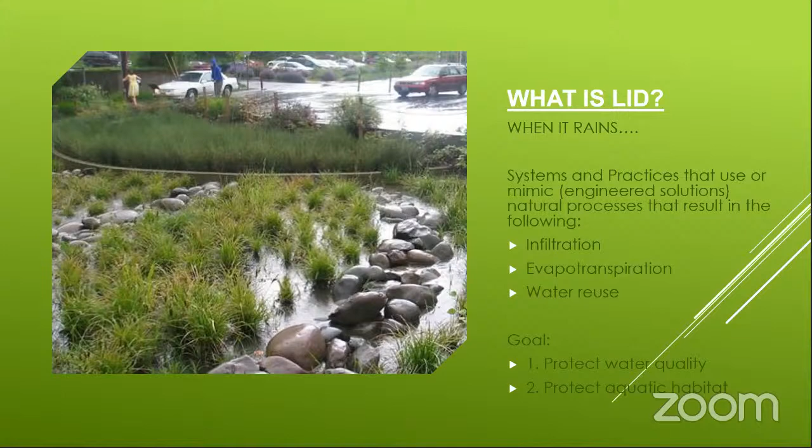So when it rains, we're trying to mimic infiltration and evapotranspiration. How are we going to do that? The number one way is through retaining the runoff from an 80 percentile storm. We want, for 80% of the storms we see in Washington County, zero discharge. It's going to be different from a detention basin - it's 100% retention. We want essentially zero discharge under 80% of the storms we're going to see. Through the presentation, that rule is called the 80th percentile rule.

Just a little history - you might remember from a couple of past presentations it used to be the 90 percentile rule. That's been reduced down to the 80th percentile, which is good news for everybody. This is one of those things that was great to have happen.

So we're going to retain 80% of all storms we see in Washington County. Who does that apply to? All the MS4 communities right now are required to implement LID strategies - those are St. George, Washington, Ivins, and Santa Clara. We're anticipating that more cities as they grow are going to be included with these MS4 cities, probably Hurricane or maybe Cedar City. But right now in our Dixie Stormwater Coalition, these are the only cities participating and having the requirement of LID.

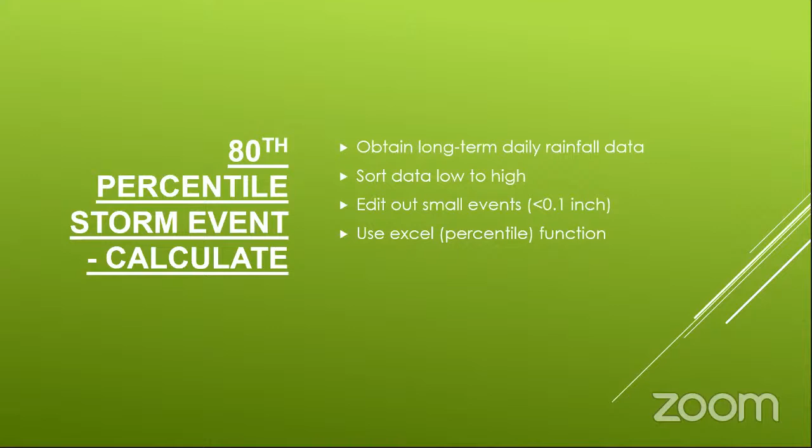So how did we obtain the 80th percentile storm event? We identify that storm event purely by depth - we're not worried about a 10-year event versus a 100-year event or whatever. What we did is obtain all the rainfall data for as long as we could go back, sorted it from low to high, took out all the data for events smaller than 0.1 inch, and used a percentile function in Excel. For St. George, Washington, Ivins, and Santa Clara, the 80th percentile depth is 0.44 inches. You're not going to have to compute or calculate this - we just want you to use this number, 0.44 inches.

Can you guys still see the slide? You like it with the lights off? Can you see that better? Would you rather have the light on? Okay.

So this 0.44 inches is going to be the 80th percentile storm depth. What that means is if we want zero runoff from 80% of our storms, if you see any storm between 0 and 0.44 inches, you're going to have zero runoff from your site. If you see a storm that's bigger than 0.44 inches, then you'll begin to see runoff from your site. But anything less than 0.44 inches, you should have zero runoff from your site.

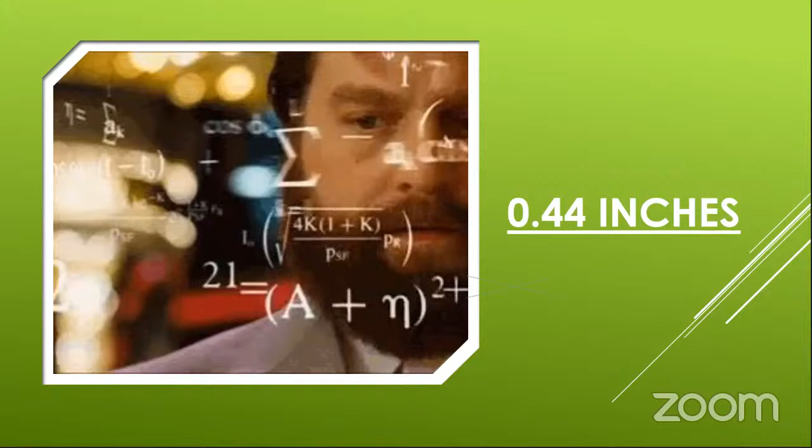Entering storm drain systems, washes, the river - it's kind of a big deal. If this is the first time you've heard this, this is kind of a big rule.

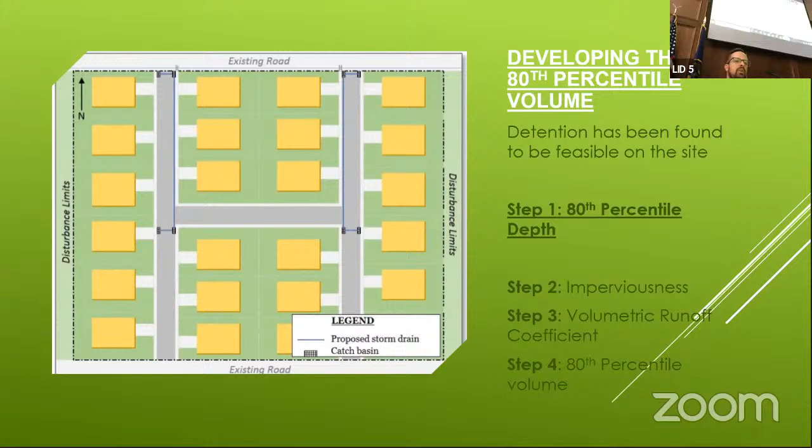So now that we know what our percentile depth is, how do we determine what the volume is going to be? The first step we've already done - we've got the 80th percentile depth. Step 2 is going to be calculating our imperviousness. Step 3 is going to be determining what our volumetric runoff coefficient is - I'll talk about that in a second. And then using those 3 parameters, we're going to come up with what our 80th percentile volume is. That's how much volume we're going to have to put on site in order to retain the 80th percentile depth.

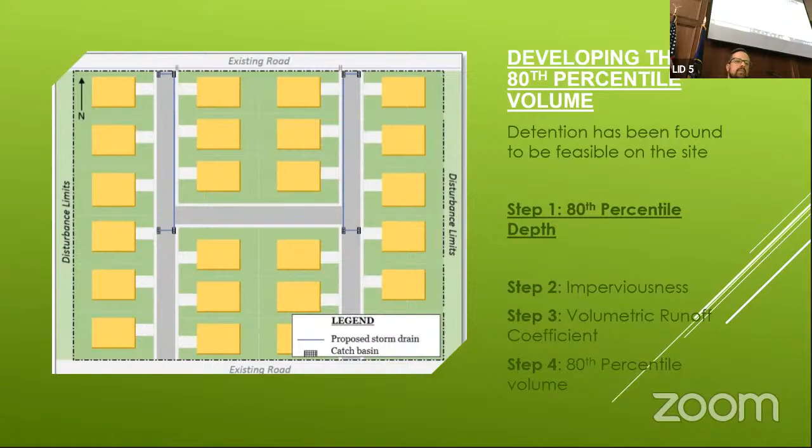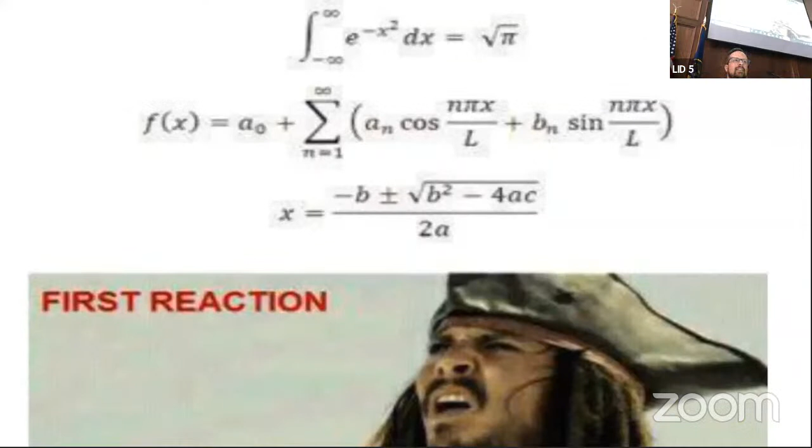First time you see this, you're going to be a little confused. It's going to be scary, but I promise you it's very simple. I see a lot of faces just like Jack Sparrow out there.

Just kidding. Okay, so number 2, imperviousness. Our project imperviousness is essentially the post-development impervious area divided by the project limits. Pretty simple. So what's included in impervious areas? That's going to be homes, future driveways, concrete work, asphalt, streets, sidewalk, curb gutter, buildings, parking lots - anything that an engineer is going to deem impervious.

You're going to say, well, we don't know what kind of homes or flat work is going to be done at the initial stages. We're just expecting you to use engineering judgment and come up with those numbers based on your criteria of what you anticipate seeing there.

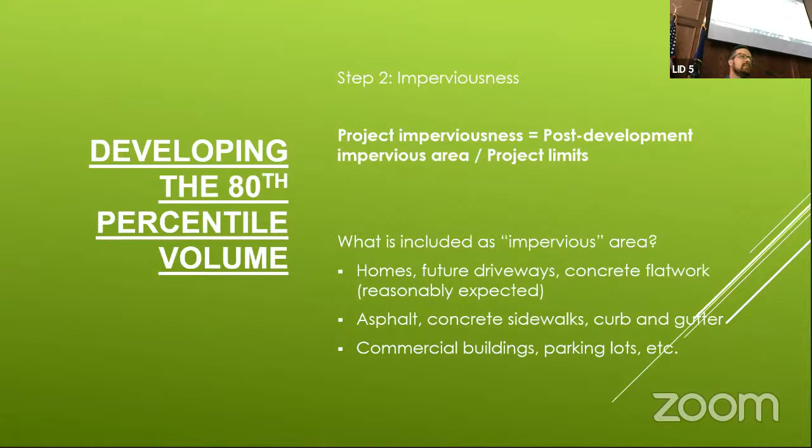And what this equation is doing is it's saying, well, we're not going to have 100% runoff of that depth. There's going to be some shallow areas, the asphalt's going to absorb some water. So this is just knocking further down the amount of water that's going to run off that you need to retain.

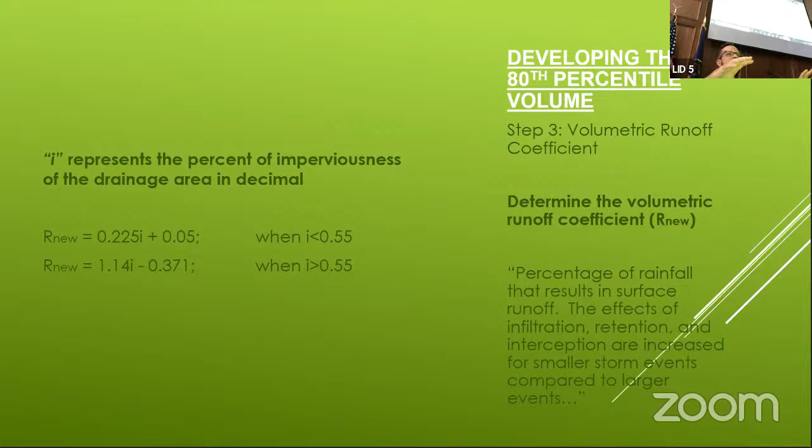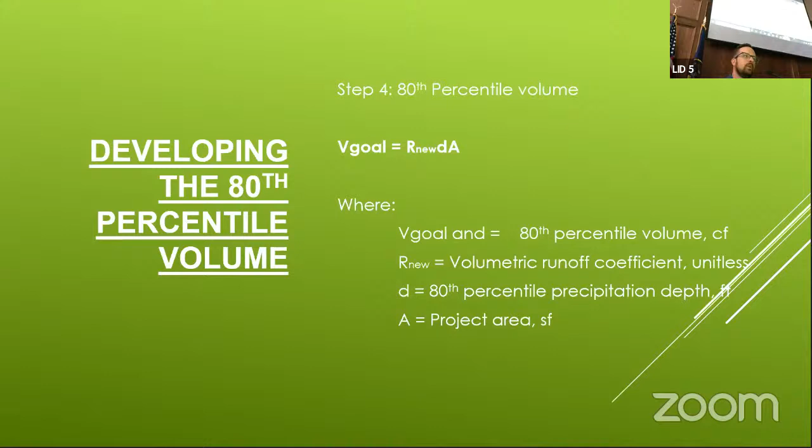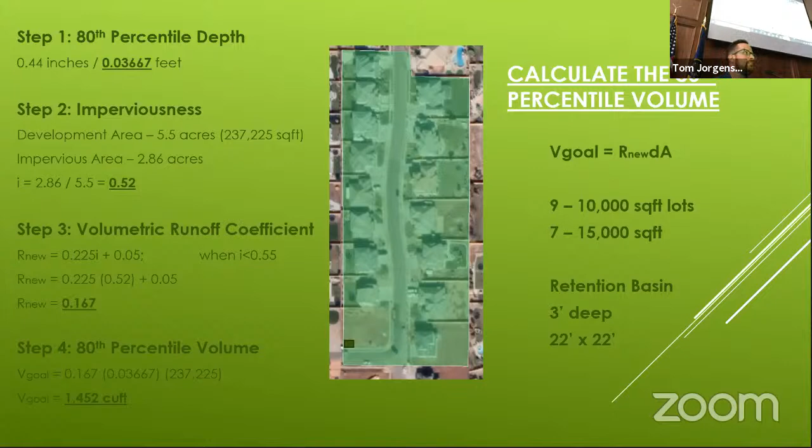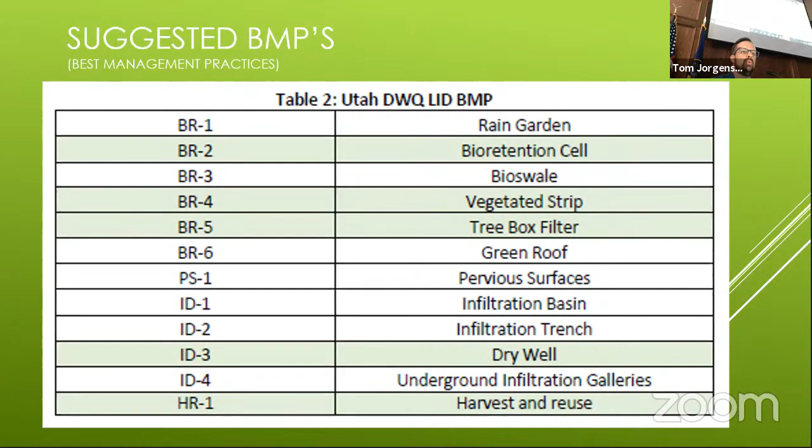So by what means are we going to be able to retain? In our manual, the state had a manual with a bunch of BMPs, and the Dixie Coalition has also created a manual, and we've included a bunch of ideas for ways that we can retain the stormwater. It doesn't have to be a big open retention basin. Obviously that's a pretty easy one we can all imagine, but we have all these other options that we can use to count as retention for meeting that goal. Here's a bunch of exhibits that we're going to go through.

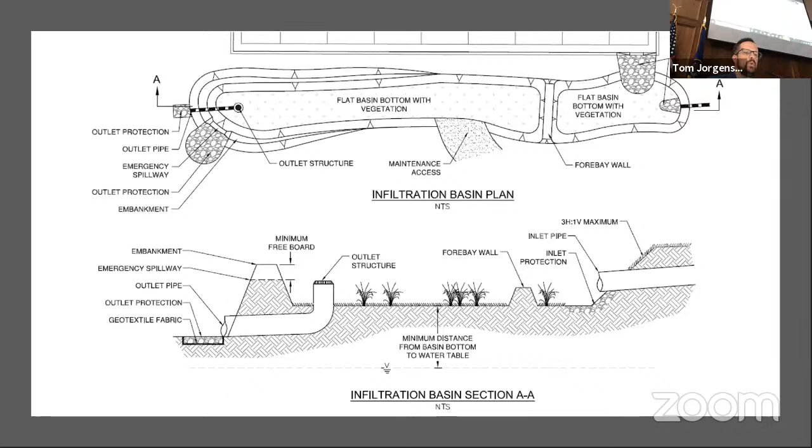So here's your standard retention basin. We're calling it an infiltration basin. You can see the outlet structure is raised up, so there's no way any of that water can come out until the water level has come up to that point. At that point, we want water to leave our site based on our detention requirements. We still want to use our storm drain systems. This is just an example, you can use these details. We have these details in PDF and CAD format, so if you want to request these details to help you through the process of a design.

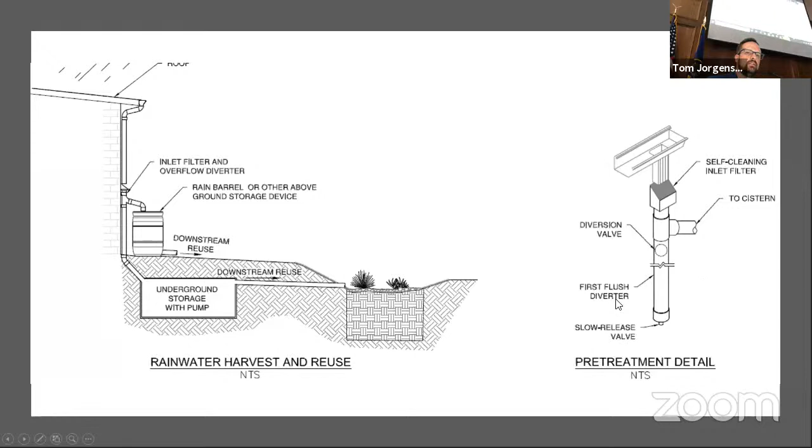Here's a rainwater harvest and reuse system. We could do above ground or below ground systems with pumps. They have an overflow that goes into some other areas, maybe a pre-treatment on the downspouts. Here's an infiltration trench along the linear sides of a parking lot or whatnot.

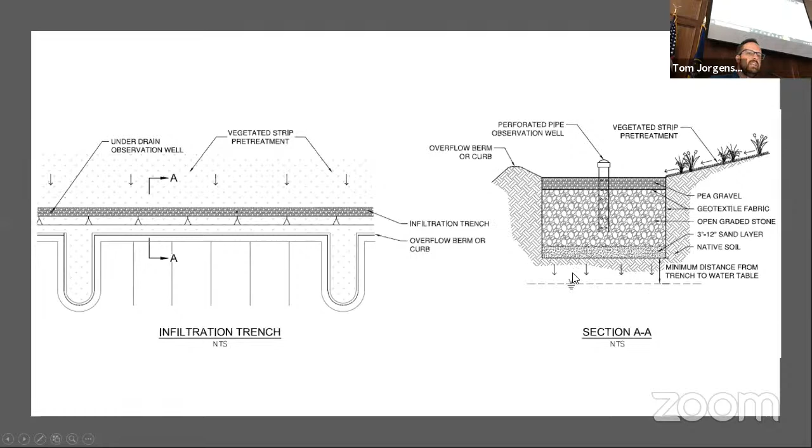Got a perforated pipe here to help us observe the level of the water. This is not a complete open volume, so you're going to have to calculate the volume of this open graded stone and the open area of this pea gravel—that's your volume. The intent is for all this water, just like the retention basin, to seep into the ground.

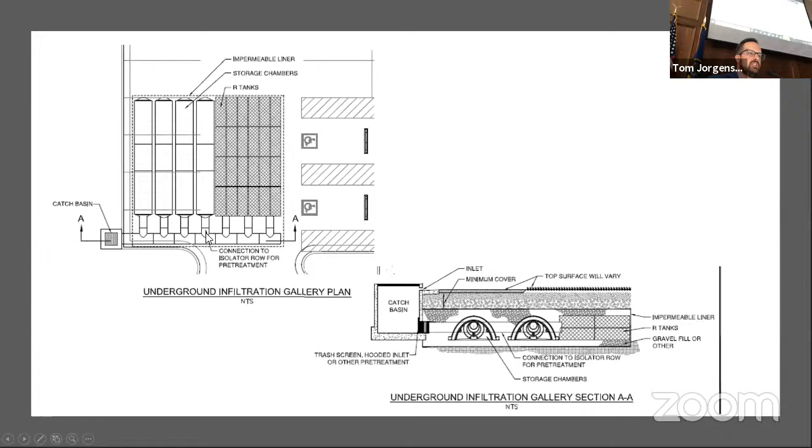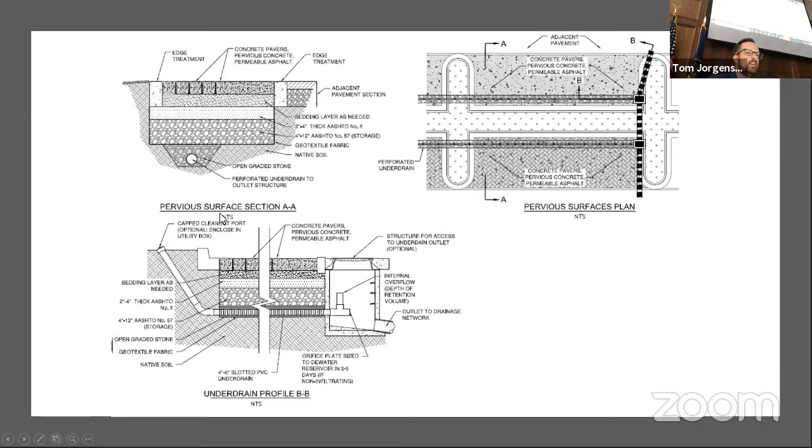Here's a dry well. Here's an underground infiltration gallery, very similar to a retention basin, same principles, except now it's below ground. Here's some pervious surfaces: paver patios, paver streets, paver centers.

Here's a rain garden, and I want to stop here for a second. You can see that this rain garden on the left has a permeable liner. So we've got a volume that's above ground, and then there's also a volume we can calculate that's below ground, engineered to mimic natural percolation. That water is expected to go into the ground through this permeable liner.

But over on this right-hand side, it's pretty much the exact same system, except now we have a method by which the water does not go into the ground, if we have circumstances where we don't want that. Instead it goes out to our drainage system, so it's got an impermeable liner. You can imagine we want these kinds of systems if we've got expansive soils, or we want to put it right next to our roadway but don't want to compromise the roadway section.

But what we're trying to achieve here is the goal of mimicking the natural systems of infiltration, percolation, and filtration before it goes into our storm drain systems.

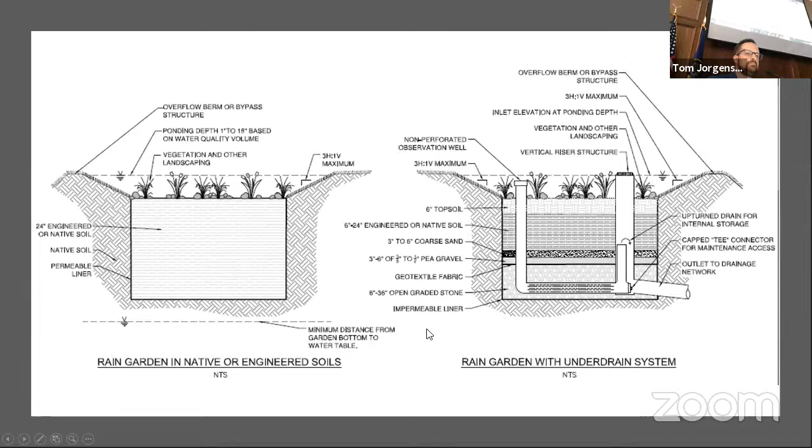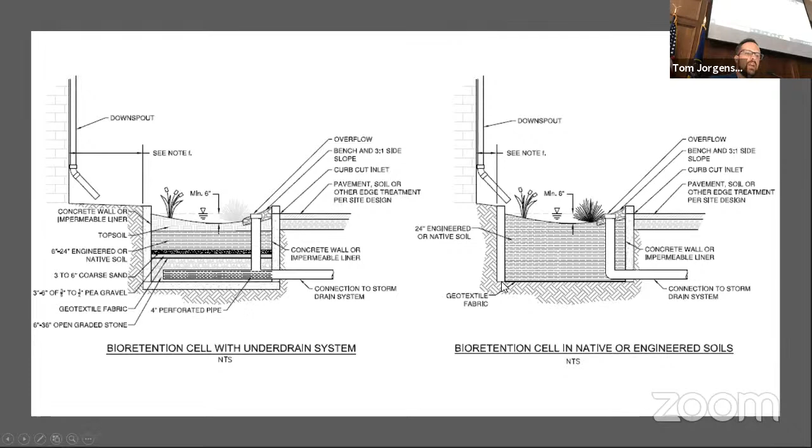Bioretention cells, very similar to these rain gardens. Again, you might have some barriers here to try and prevent water from going where you don't want it to go. This one's got a hard bottom on it, this one's got an open bottom on it—different applications.

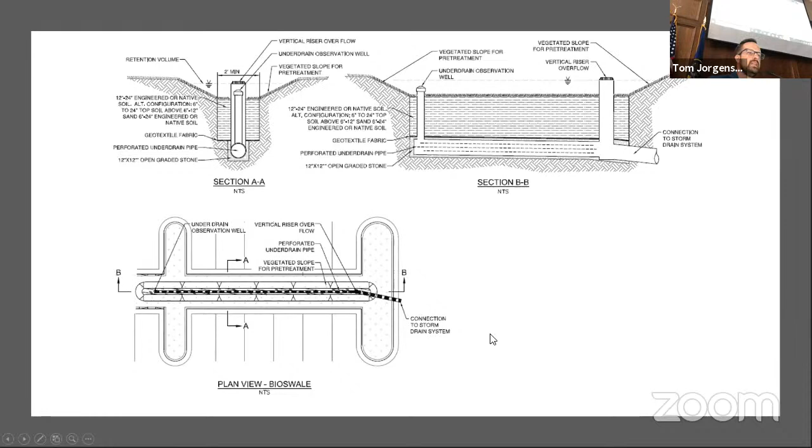Bioswales—put these in parking lots, down the center lines of your roadways, on the sides of your sidewalks, and curbs and gutters.

Vegetated strips. There are studies out there that show, as water's flowing over these vegetative strips, how much actually gets percolated into the ground. Well, that volume should be counted. So if you're running it over some sort of rock or grass or landscaping, that volume should be calculated and counted as your total volume for your site.

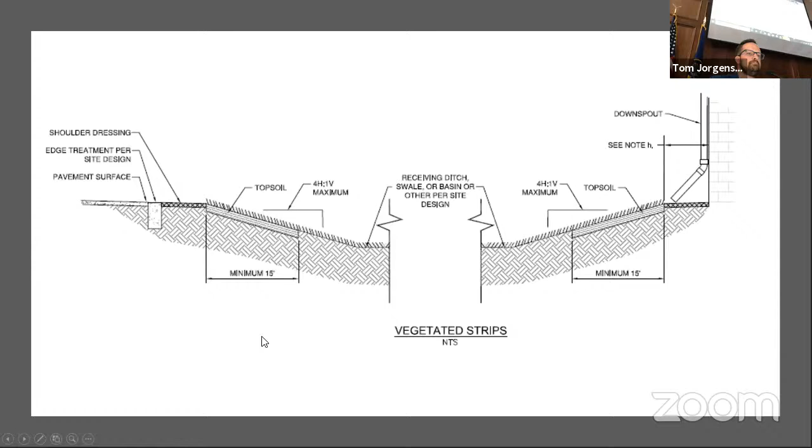Tree boxes—you can see these tree boxes have concrete walls on all four sides and bottom. You can also do these without a bottom and not have the connection to the storm drain system.

Okay, any questions about these example BMPs?

Pretty straightforward. Now, the manual that the Dixie Stormwater Coalition has put out doesn't have a lot of equations for calculating what the volumes of these are going to be. The state's manual does, and the EPA manual on their website has a lot of literature for how to calculate volumes for these types of systems.

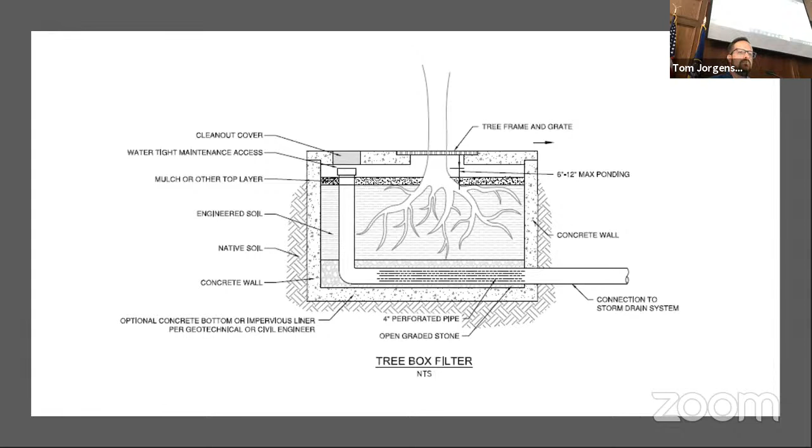Just use your engineering judgment for what you think is applicable and what's not.

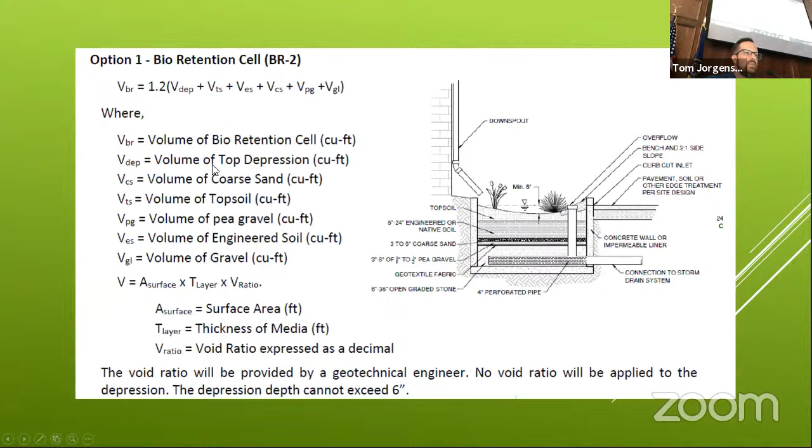So we've got this new development coming in, pretty standard catch basins, storm drain systems going out to the existing roadways. So what is LID going to look like in this kind of subdivision? We've got this bioretention cell we're looking at, with the volume of all these different layers. We're going to come up with a volume that is going to go to that, and ask ourselves which of these BMPs are going to work for us.

In our manual, we've put together this matrix to help you understand which BMPs are going to work for you on your very specific site and which ones aren't. We want you to use this matrix at all different levels of planning.

In the manual, there are maps showing what the hydrologic soil groups are and where we anticipate seeing groundwater depth. At the very preliminary level, you should be pulling these out when you're meeting with your client and say our depth of bedrock is really shallow, so this is going to limit some of the things we're able to do with our subdivision with LID. The soils in this area are not permeable.

We're not going to be able to infiltrate water into the ground, so a lot of our options are going to be taken away from us. But at every level, we want you to use this matrix to help identify which BMPs are going to be able to be used on your specific site.

So step 1, you're going to look at depth to bedrock, and ask is the depth to bedrock acceptable? Groundwater depth, is this acceptable? If not, it's going to run you down different systems. So we'll follow the yes for right now.

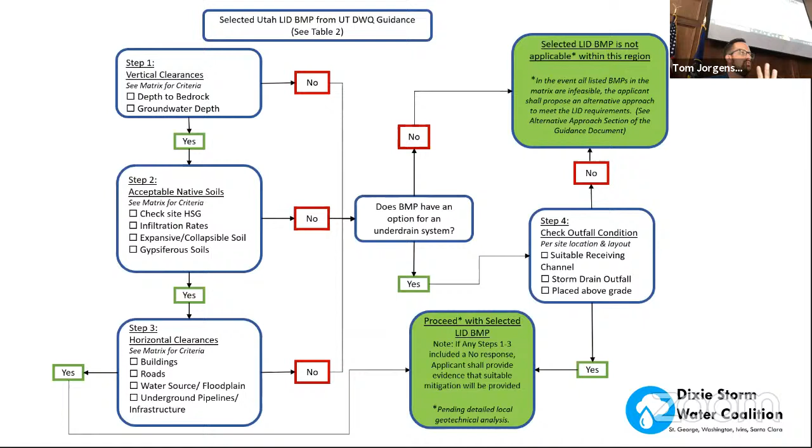Ideally, you'd take each one of these BMPs and run it through this matrix. And if it turns out you get all yeses and you come to here, you go, okay, well, they're all good—this BMP is acceptable for this site. It should be, not necessarily used, but in your toolbox as a BMP we can use.

Let's use it or not, just depending on whether or not you feel like you need to. So now if we run through these no's, they all end up in one spot.

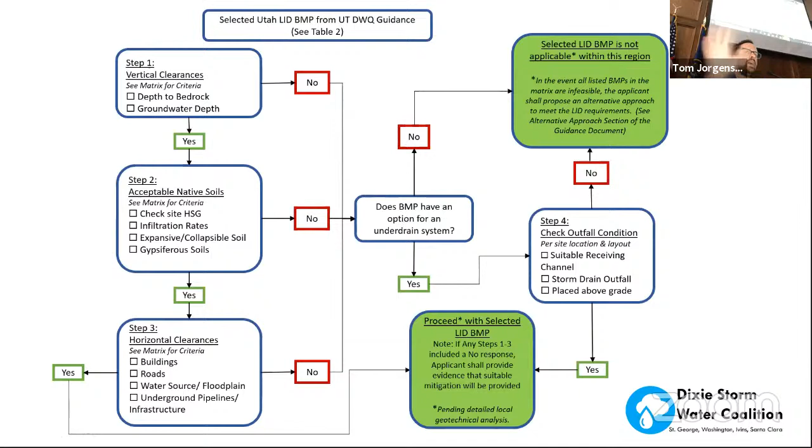Here it says, does the BMP have an option for an under drain system? Now you might be saying, well, if I get a no, why am I ending up here? Well, you're getting a no for a reason. Maybe your depth of groundwater is too shallow and you don't want to be putting that water into the groundwater. If there's an under drain system, that means you've got an impermeable layer and you're sending all that water now to a storm drain system instead of into the ground. Now your depth of groundwater doesn't really matter—you're sending it to a storm drain system.

So yes, okay, let's look at the outfall locations, because if you have an under drain system, you're going to need to be sending it to either a channel, storm drain, or placed above grade. If that's still not available to you—if it is, then it's a usable BMP. If it's not, then you're going to end up here.

If you go through all your BMPs, if there's not an under drain system and you come up here, the selected LID BMP is not applicable within this region. You're not going to put that BMP as one of your tools for your toolbox.

Now in the end, in the event that all listed BMPs in the matrix are infeasible, the applicant shall propose an alternative approach to meet the LID requirements. I'm going to talk about this here in just a second, but there are some options for us outside these actual BMPs that we can do to still try and meet the requirement. If you don't have any BMPs that are going to work, you're still not off the hook. We still want you to do something—I'll talk about it in just a second.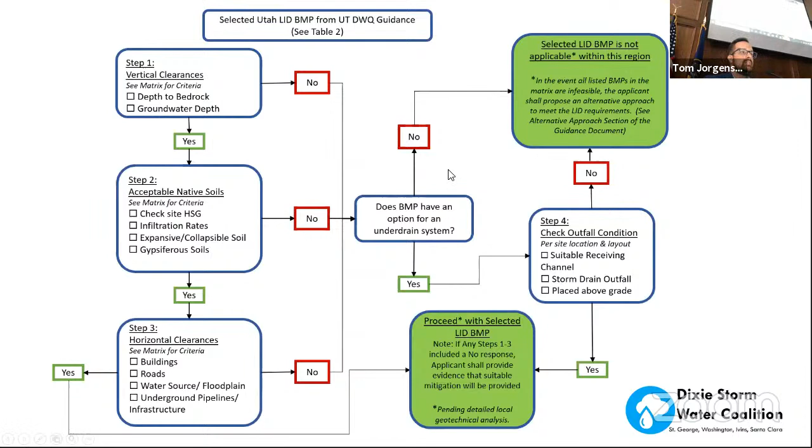And along with this matrix, we've got this table, and this is what's meant to help us. So I'll take you through one of these. Let's say you're looking at a rain garden. We want to make sure that our groundwater is at least greater than 10 feet if we're going to be putting in a rain garden, and bedrock's at least greater than 5 feet.

We want to make sure that we're in hydrologic soil groups A or B, and that our infiltration rates are 0.5. So this is kind of your cheat sheet as you're going through that matrix to say, what about the bedrock? You can look here and say, oh, they're saying if it's greater than 5 feet, then we're okay. If it's not, then we're going to say no and move on.

So this is a pretty daunting table, but it's meant to just kind of help you along the way as you're going through the matrix. Any questions on the matrix and its use or effectiveness?

Again, this matrix is going to be used through the different levels of planning. In the very initial stages, you're going to be using the maps, maybe in our guidelines. But as you move farther along, now you're going to be using your recommendations from your geotech and what they're telling you. Maybe they're saying no, the 10 foot to groundwater is unacceptable, we're going to have to go deeper or more shallow. Or maybe they're going to say that yeah, on your preliminary maps it says A or B, but it's actually a C, let's look at something different. Maybe you're not quite getting the infiltration rates that you were wanting. So as you're moving along the process, use better and better information to help you make your decisions.

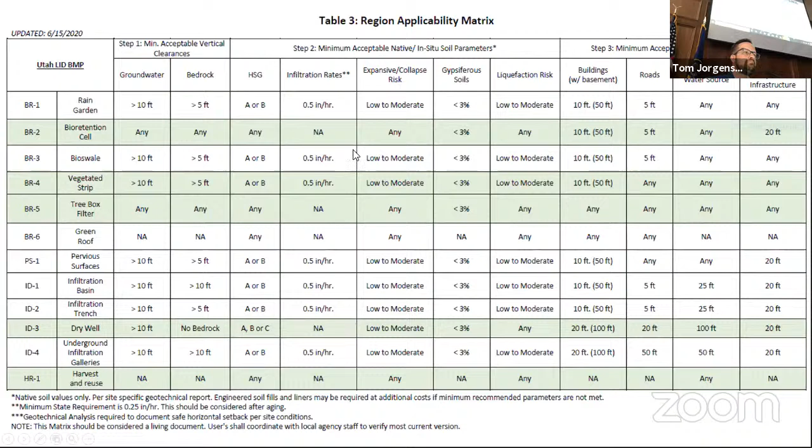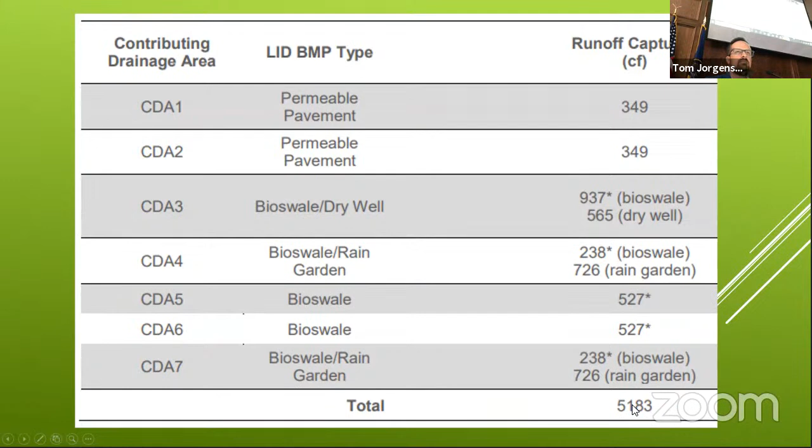So for that development, we've got all these BMPs that we've decided we want to use. Our permeable pavement, we're getting 349 cubic feet of volume to count. And in total, we've got 5183 volume from all these BMPs. Now we've met our goal.

We're going to put our dry well up here. We're going to put some permeable pavement at our entrances. We're going to do some rain gardens along the side and bioswales. So now instead of our initial development looking like this, now we've got a development with LID principles incorporated into it. This is a pretty complicated system. We're not saying that you need to use 7 or 8 BMPs to qualify. You can use 1 or you can use 10, as long as we're doing our best to meet our goal. Any questions so far?

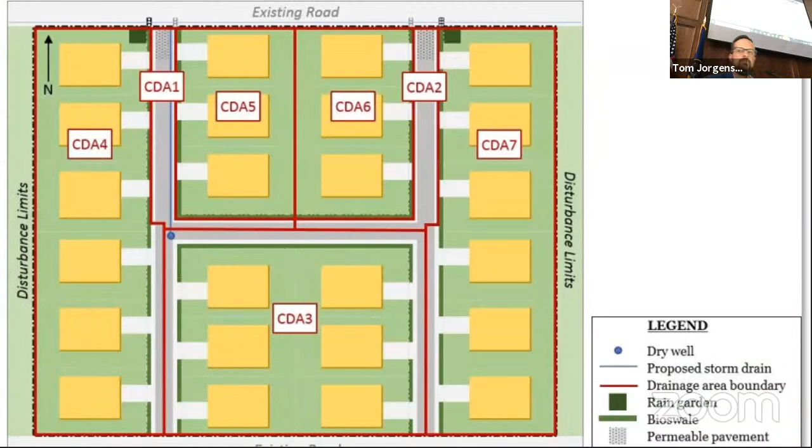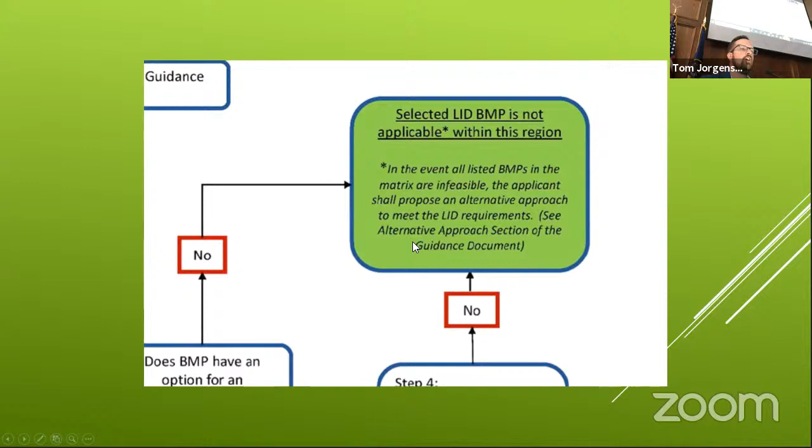Okay, now we're going into this little box here that I read. If all your BMPs are infeasible, we need an alternative approach. I'm going to read these couple paragraphs. Technical infeasibility: this guidance document and matrix are intended to assist the user to work through feasibility of the Utah BMPs for use within this Dixie Stormwater Coalition region. According to the UPDES permit from the state of Utah, infeasibilities which should be considered technical are listed as high groundwater, drinking water source protection, soil conditions, slopes, and others. So those are our technical infeasibilities that are making us run through our matrix and hitting no every time.

So in accordance with the Utah DWQ permit, alternative approaches from the retention requirement will only be allowed with a site-specific engineering study that demonstrates infeasibility based on insurmountable constraints, and may be permitted on a case-by-case basis. An alternative approach will require that retention and BMPs are incorporated to the maximum extent feasible. So if you can get 60% of your goal volume, we want you to do that. If it's 100% infeasible to get that remaining 40%, we still want you to do the 60%, which includes disconnecting impervious area for the permit. This may include a reduction in the required retention volume permitted, as long as verifiable documentation can be provided to adequately show that the proposed plan will meet our goals of protecting stormwater quality and reduce the discharge of pollutants into the MS4.

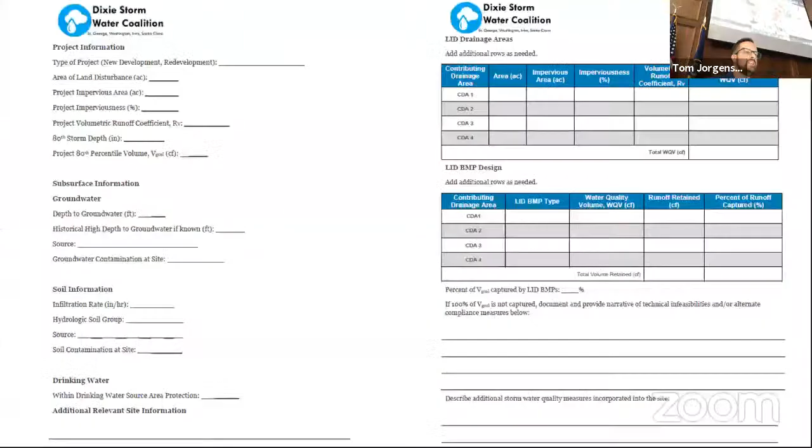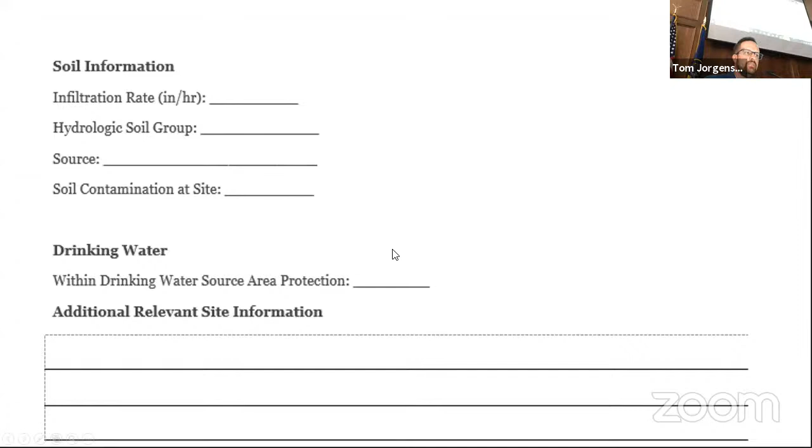In the manual there's a couple of these sheets. I've kind of got them blown up so we can see them a little bit better as we go through the slides. So we're going to be asking for stuff like the total development area, the volumetric coefficient, percentile volume, depth to groundwater. We want you to be determining what all these things are so that when the state comes to us and says how come they didn't do all that they needed to do, well, we can return to these documents and say, well, here's where it's laid out. Soil infiltration rates, hydrologic soil groups, protection areas.

This is where you're going to start computing what all of your BMPs are and how much volume you're going to get from each one of those. I can imagine that your supporting documentation is going to be a little bit bigger than just these 2 pages, because we need to be able to see the documentation behind these calculations and whatnot.

Percent of V goal captured by the LID BMPs, we hope to see 100%. And if not 100%, we want you to document your technical infeasibilities and alternate compliance measures.

So, site practice designs. This is kind of going into the realm of if you can't get the volumes that you're required, maybe we can only get 60% of the volume. The state is also going to want us to see some best practices stuff that have nothing to do with maybe the volumes per se, but more just good site work stuff.

What does that mean? Well, let's try and reduce the impervious surfaces. If you come in and say we're doing all this, and then all of a sudden you scale it back, that should count as part of your design principles, and you should tell us that's what you're doing to try and meet these LID requirements, so we can tell the state, no, this was their original plan. They tried really hard to reduce impervious surfaces. This is the route that they're going to go.

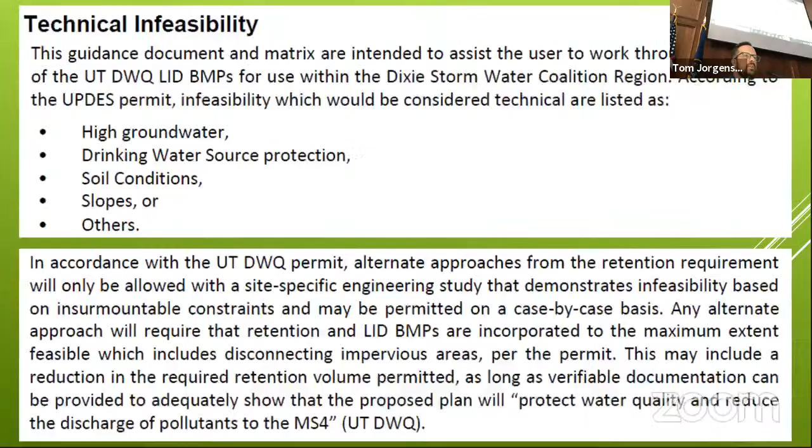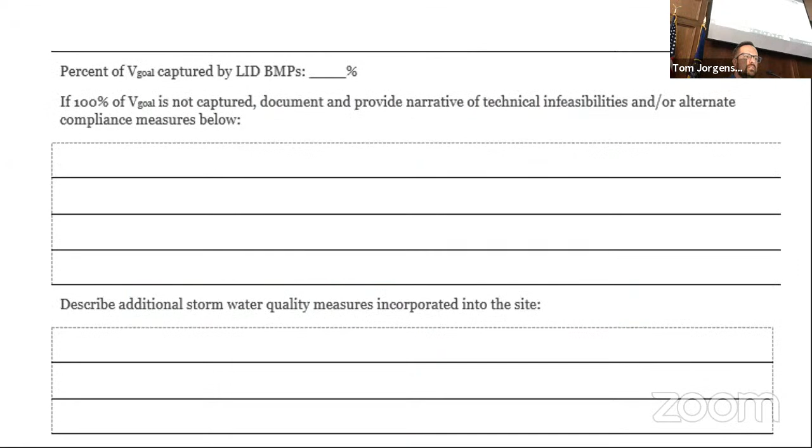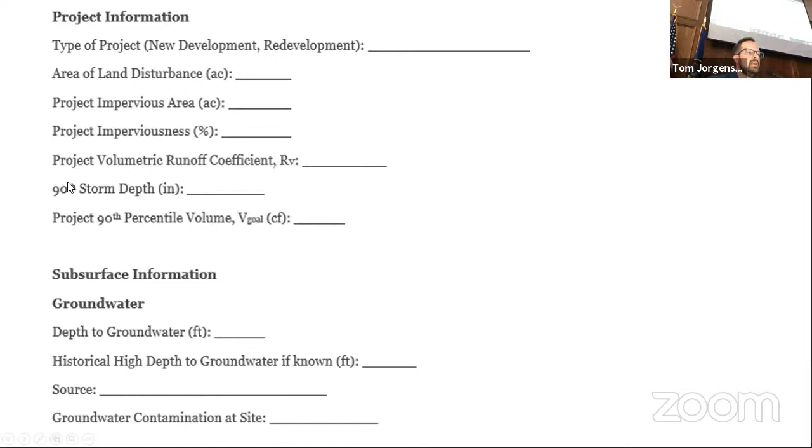Keep going. It's a good catch. Definitely need to change that. Where did we see that? Oh, the manual is updated. So it looks like I've got a not quite current copy of the manual. So you're right, this is definitely 80th percentile, not 90th. Any other questions?

I would imagine that every city is going to be different. That's probably a good topic for the panel discussion. We want our streets to meet our design criteria and whatnot, and if we can't get that from a permeable pavement, then we probably shouldn't be doing it. But our entrances to a private community, sure. Private roads, yeah. Maybe even parking lots, since they're being maintained by the owner. We're open to parking lots. Sure.

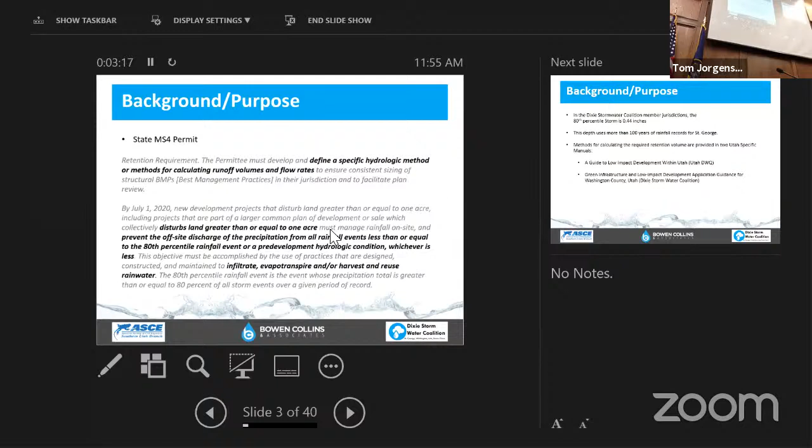In the coalition member jurisdiction, the 80th percentile storm is 0.44 inches, and this depth uses more than 100 years of rainfall records for St. George - I think it's actually like 127 years of rain gauge data. And they just run a formula that says 80% of all storms are this much or less.

There are 2 manuals I'll briefly introduce. We've got the Guide to Low Impact Development within Utah from the Utah DWQ, and the Green Infrastructure and Low Impact Development Application Guidance for Washington County, Utah.

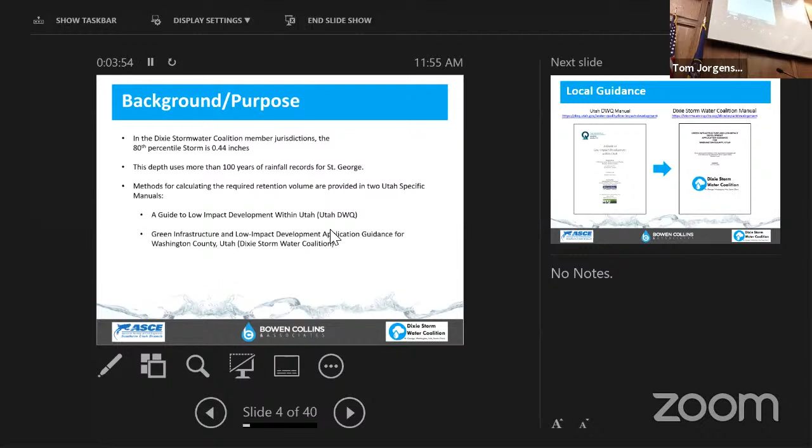Here's a screenshot of the 2. You've got the state manual on the left, and then the coalition took that state manual and reviewed the recommendations in there, making some extra recommendations with a perspective unique to the arid environment and the unique soils and conditions we have here in Washington County.

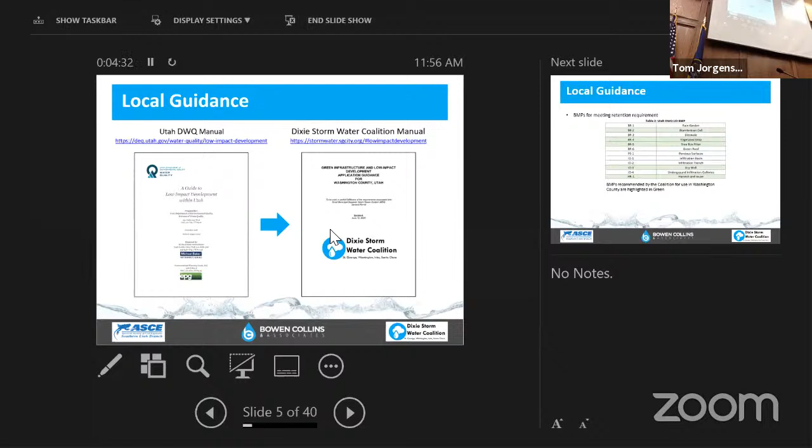The Stormwater Coalition took this table. Table 2 is basically all the BMPs that are in the state manual, and it's hard to see on this screen, but there are some green highlighted rows. BR2, BR4, BR5, ID3, and HR1 were identified by the coalition as their preferred BMPs. That doesn't mean you can't use the other ones, it's just a recommendation—we see these as probably most applicable to our area.

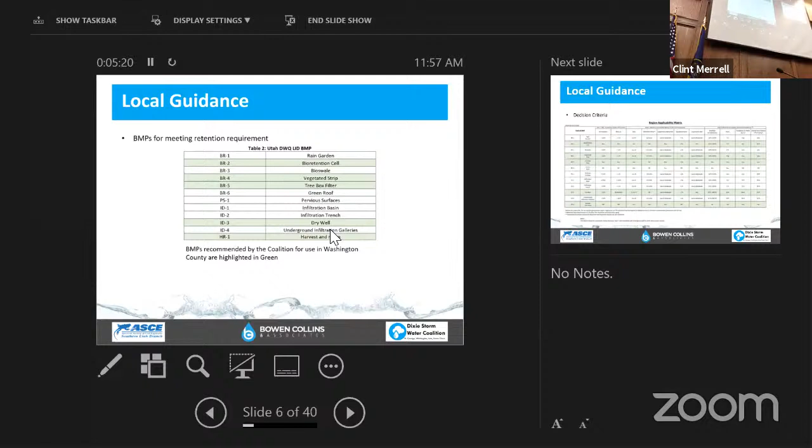The state asked them to adopt a minimum of 5 BMPs, or each MS4 to adopt a minimum of 5 BMPs acceptable for use. Again, you can use the other ones, but these are just some they're thinking are applicable to our area. You've seen this already.

And then I'm going to talk about one alternate method, which is disconnecting connected impervious areas.

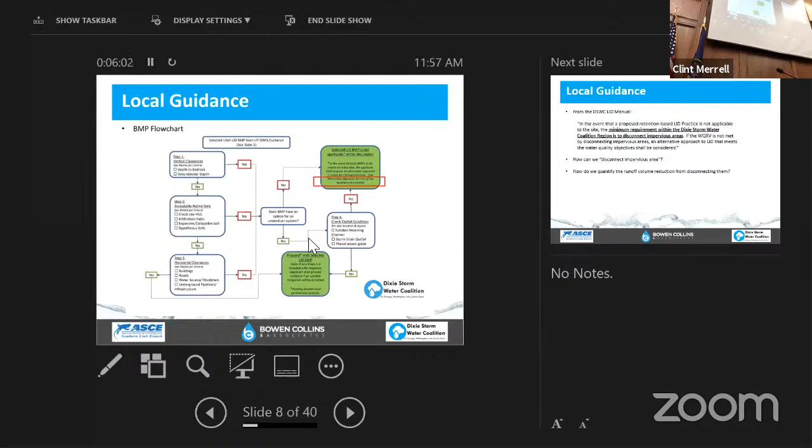This is a quote from the manual: in the event that a proposed retention-based LID practice is not applicable to the site, the minimum requirement within the Dixie Stormwater Coalition region is to disconnect impervious areas. If the water quality retention volume is not met by disconnecting impervious areas, an alternative approach to LID that meets the water quality objectives shall be considered. So go through all your BMPs and also consider disconnecting impervious areas as a bare minimum—if you don't want to use any of those other BMPs, you can use this one.

And even if this one doesn't work and you don't want to use it, they're open to other alternatives. But it's going to be up to the engineer to develop those alternatives and present them.

So now I'm going to talk a little bit about how we disconnect impervious areas and how we quantify the runoff volume reduction from disconnecting them.

First, what is a directly connected impervious area? A directly connected impervious area, or DCIA, is defined as a surface where stormwater conveys from an impervious land cover to a storm drain or waterway. Here we're showing rainfall running on a roof, through a gutter, down a spout onto pavement and into a storm drain. There was no chance for that runoff to infiltrate or evapotranspire—basically every piece of water that hits that impervious surface is making it into the storm drain and leaving the site.

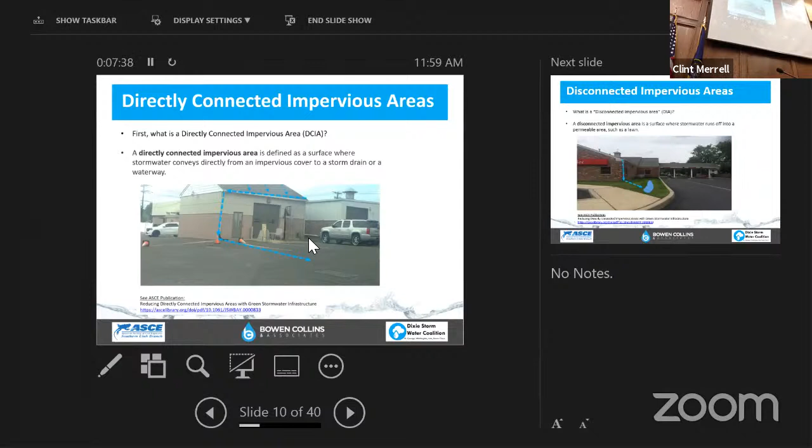Okay, what's a disconnected impervious area? A disconnected impervious area is a surface where stormwater runs off into a permeable area such as a lawn. This is taken right out of an ASCE publication—both of these figures are from there, and I've got a link to it.

Here, the runoff hits the roof, goes down the spout, then hits a lawn, and travels over a certain distance across that lawn before it makes it to the curb and gutter or an inlet that conveys it to a final outfall point. Without being able to fully infiltrate, it has an opportunity for some infiltration and some evapotranspiration. That lawn isn't specifically graded to trap water—we're just trying to get the water, instead of going onto the driveway and then the parking lot, to go over some landscaping first. Higher flows are just going to go right over it; they're not going to infiltrate much, and they'll go in just like they always have.

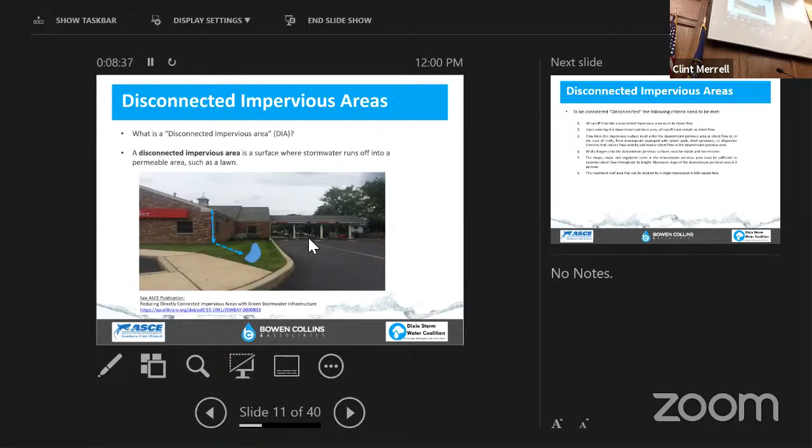Okay, now in looking at this and at other jurisdictions that have been doing this longer than we have, we came up with a couple of criteria that are commonly accepted for determining disconnection. If I run water over 5 feet of a park strip and then into a curb and gutter, is that disconnected? Well, not really, because you didn't give it much time to infiltrate. So we got some minimum criteria here for what's considered disconnected.

The runoff from the unconnected or disconnected impervious area has to sheet flow. So you don't put it into an earthen ditch and then into the storm drain. You're letting it spread out and then be channelized again after it's flowed over some pervious area. Upon entering the downstream pervious area, the runoff has to remain as sheet flow. So again, you can't have a grassed ditch and call that an infiltration or disconnected impervious area.

Flow from the impervious surface has to enter the downstream pervious area as sheet flow, or in the case of roofs, from downspouts equipped with splash pads, level spreaders, or dispersion trenches that reduce flow velocity and induce sheet flow. I mean, these first three are kind of all the same thing.

Discharges into the downstream pervious surfaces have to be stable and non-erosive. So again, you want something to spread your flow out so it's not eroding the surface it's going onto—gravel, mulch, or something like that. The shape and slope of the vegetated cover in the downstream pervious area has to be sufficient to maintain sheet flow throughout its length. And again, we've just adopted the maximum slope as 8%.

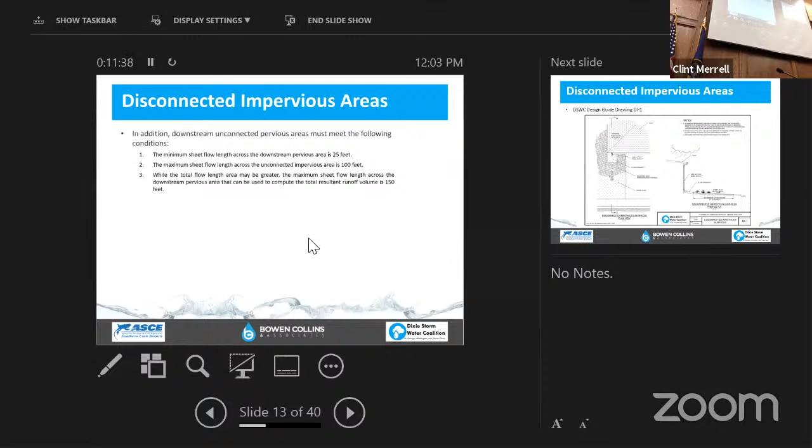I know we're going through this kind of fast, but I'm going to make myself available for questions after, and you can email me as well.

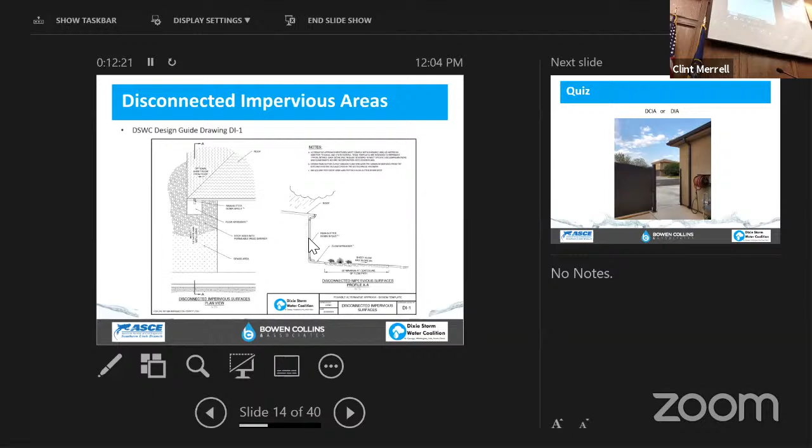So then I have a little quiz. This is my house. Is that a directly connected impervious area, or a disconnected impervious area? Any guesses? Directly connected—winner, chicken dinner. Well, I'm not redeveloping my site, so the permit doesn't apply to me. And I'm also less than an acre.

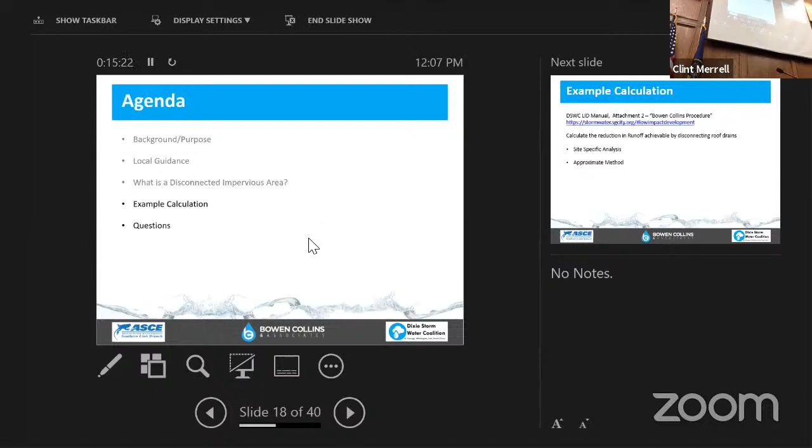So here's a link that will take you directly to the coalition's website and to the low impact development section where you can download this memo. It's available separately and also as part of the larger manual. We're going to first talk about a site-specific analysis, which involves a bunch of calculations, and then an approximate method which saves you time but probably underrepresents the reduction you'll get—it's conservative in that it says you're getting less reduction than you actually are. So if you want the most bang for your buck, you want to do a site-specific analysis.

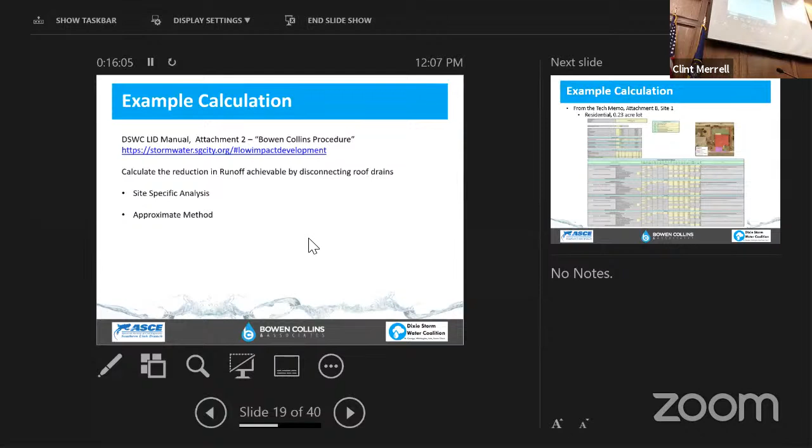How do you turn it on the bottom? Try that. Perfect. Okay, thanks.

So again, if you look through these examples, it'll give you an idea of some of the sites I looked at. Percent impervious ranged from 55 to 80% impervious. Those tables in TR55 for residential quarter-acre lots assume, I think, like 35% impervious. So they're more pervious than the lots we typically get in Washington County. So I'd say to anybody reviewing those, take special care looking at curve numbers as they come in, that the percent impervious for the curve numbers really represents the percent impervious of the development that's going in.

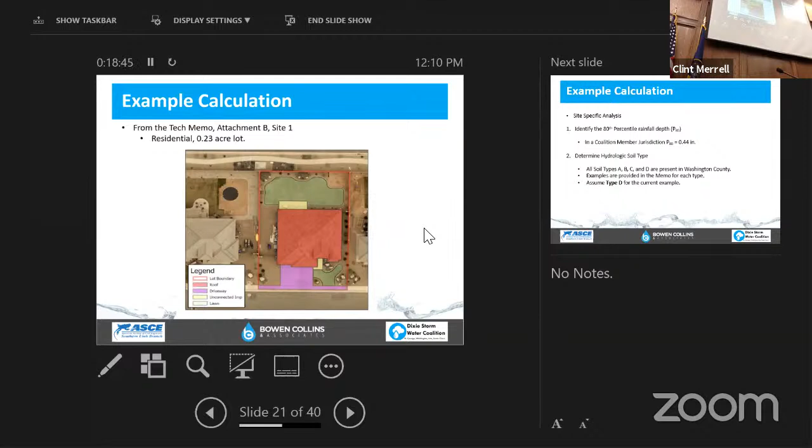Here I've gone through and identified various land covers. I've got grass highlighted in green, unconnected impervious areas that sheet flow off into grass or gravel are yellow. Red would be a roof. I distinguish roofs. And then purple is a directly connected impervious - anything that hits that goes across an impervious surface gets into the storm drain. Anything not colored is other pervious. Really, it's rock mulch that I used.

For a site-specific analysis, these steps are numbered, and in the memo there's also numbers. These correspond. So if you wanted to get that memo or the manual out, you could follow along this PowerPoint with those steps, and it should correlate one-to-one.

Identify your 80th percentile storm - we already know that, 0.44 inches. Now determine your hydrologic soil type. This is where you're going to have to again use engineering judgment. You can use the NRCS maps, but if you're in a badlands area or something like that, rockland, something that doesn't really have a hydrologic soil group attached to it, you're really going to want to go out there and look at the soil and have it tested and understand what your underlying natural conditions are.

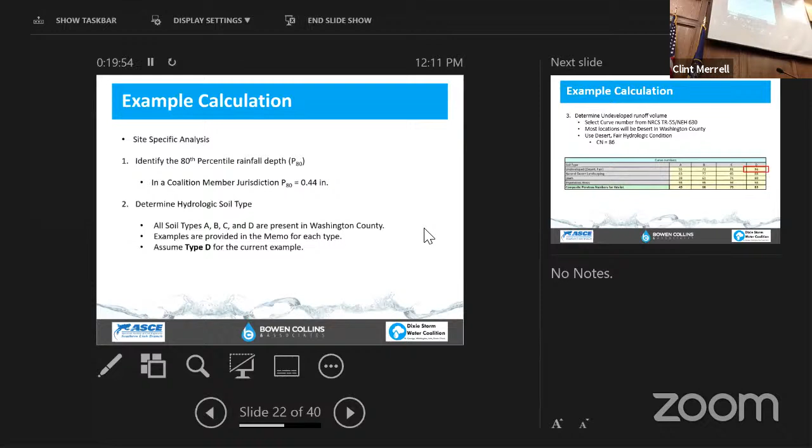We're going to assume in these calculations - you'll see the table has soil type A, B, C, and D. I just ran through calculations for each site, assuming it was one of those four types each time to kind of show what the differences are in the numbers. We're going to assume type D for this example, so we focus on the bottom section of this table.

You're going to first do your undeveloped runoff volume. I think everybody should know how to do this that's done this. You're going to select a curve number from TR 55 or NEH 630, that's your tables where I mentioned. And most locations in desert in Washington County, undeveloped condition are going to be desert in some kind of hydrologic condition. Again, you have to make that based on aerial photographs, site visits - does it have 30% coverage vegetation, between 30 and 70 I think the cutoff is, or more than 70? That's going to determine if you're poor, fair, or good.

I assume based on aerials of this site before it was developed that I was fair, that I had somewhere between 30 and 70% covered in creosote or grasses or something like that. So I went to the TR 55 tables. Type D soil, undeveloped, desert, fair condition is 86. So for my undeveloped condition, I'm using 86.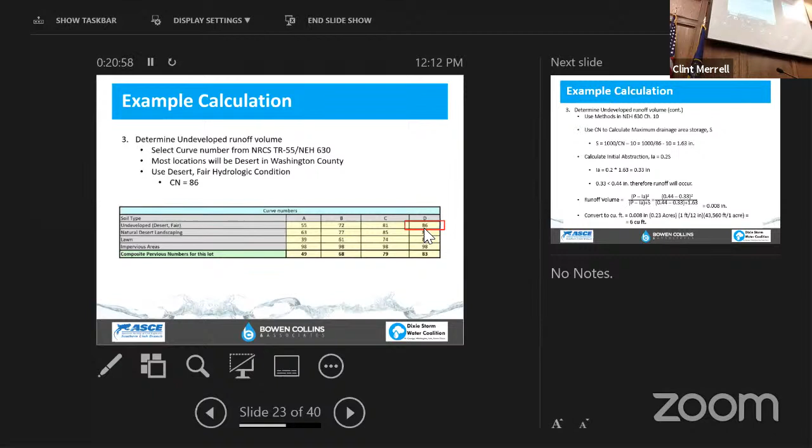Okay, now here's where the numbers are going to start flying at you, but hopefully you already have tools that you're already using to do the curve number method. This just kind of gets you into the nitty gritty of calculating volumes using the curve number method. We're not going to talk about peak discharges, we're just talking about total volume of runoff. So you're going to follow along with NEH 630.

You're going to take your curve number, plug it into an equation. You're going to get your maximum potential storage. That's the maximum that your site is assumed to be able to store in local depressions or trees and lawns and things like that, just in the natural condition.

That's 1.63. Then you're going to say, okay, when I have a storm, I have initial abstraction - that's all the storms that happen right at the beginning of the storm. Once those pools fill up and trees have taken up what they're going to take up and bushes have taken that up, I'm left with the total initial abstraction. So we're going to just make the assumption that's 0.2 times our maximum storage potential, so we're going to get 0.33 inches.

So in this case, because our initial abstraction is less than 0.44 inches, that means there's still 0.11 inches that are not going to be filled in those depressions, and it's going to run off our site. Now we're going to figure out how much volume that creates. There's an equation in the NRCS methods that you can see there - I plugged them in.

I've plugged in 0.44 for our precip under P and our initial abstraction. When you work that all out, you get 0.008 inches. That's almost nothing, right?

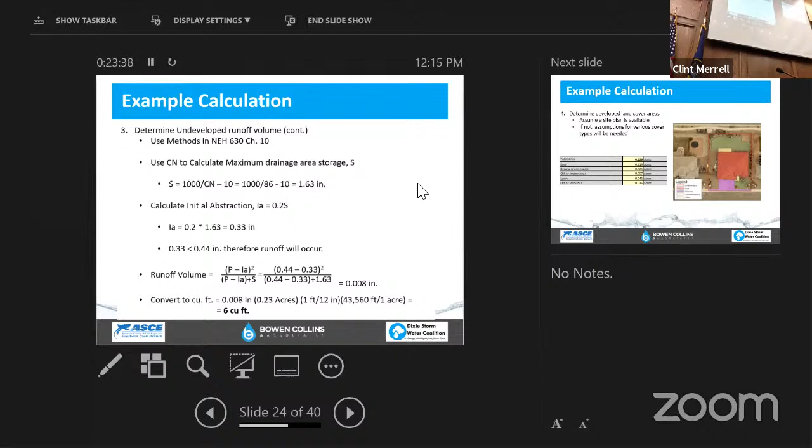Okay. Oh, I think I went too far.

Now we're going to move on to doing, okay, what's our runoff if all of our directly connected impervious areas are connected? Our roofs are directly connected to our driveways or our yard drains. What's our runoff going to be?

So this is like worst case, assuming a site plan's available. Again, you're going to have to make assumptions, but I've just got a table here that tabulates all the various types, and we're going to use this table as we move on.

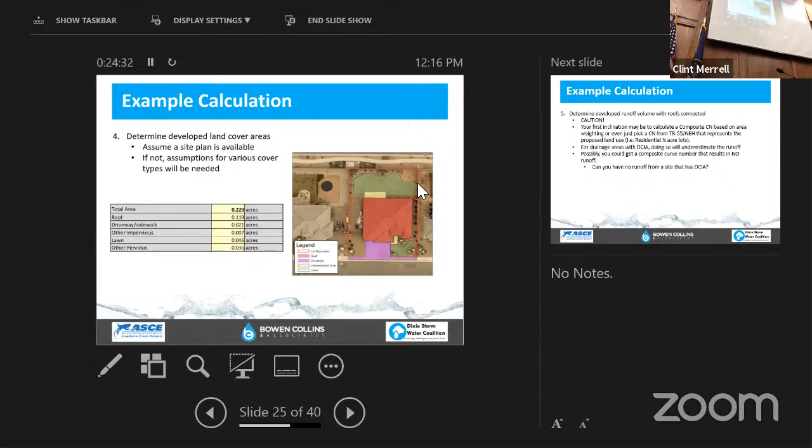I've just kind of drawn it in. Now, if I was doing this off of a plan or just a site plan, I would have to make an assumption that says, based on typical lots I've done in the past or similar subdivisions, we're going to have roofs that are about this many square feet or this percentage of the total lot, and this much is going to be lawn and this much gravel and xeriscaping essentially.

Now, I'm throwing a caution up here, and I already talked about this a little, that your first inclination is just going to calculate a composite curve number based on area weighting. That's what we all have done in the past. Or you're just going to pick something from that table that says, oh, I have residential quarter acre lots, I'm going to use a curve number of 80, type D soils or something.

Well, again, that table is assuming a 30% or 35% impervious area, but really in this site I've done the calculation, I have 64% impervious, so that number doesn't apply to my site. And then the other thing you want to be aware of is that if you do that, when you have a drainage area that has directly connected impervious area, you're going to be underestimating your runoff.

Possibly you could calculate a curve number that results in no runoff, even though you have directly connected impervious area. So just a quick question, can you have no runoff from a site that has directly connected impervious area? What do you think?

Yeah, no. Little caveat, in the curve number method, the curve number for impervious is 98. So it still kind of accounts for water soaking into the concrete or whatever your impervious area is. So you could still potentially have a non-runoff event, but a very, very, very slim chance. We are, though, accounting for a little bit of storage and a little bit of stuff being lost from hitting a hot roof and evaporating or getting into the concrete, but generally no.

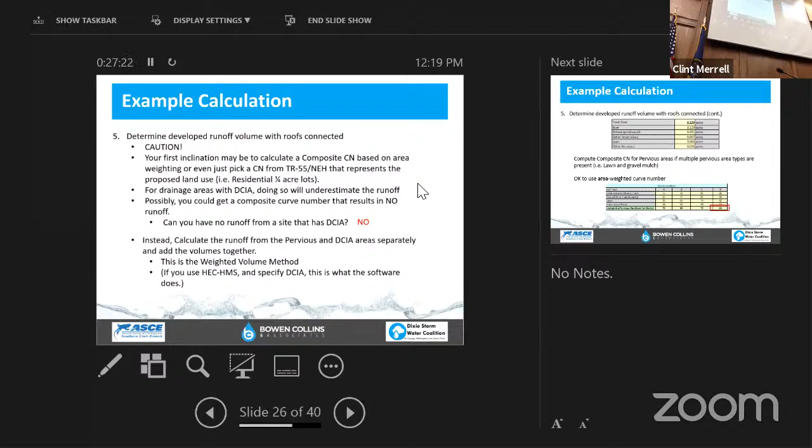Okay, so first we're going to develop runoff with roofs connected. We're going to take a little side and look at what we have: lawn and rock mulch. Lawn has one pervious number, in this case 80, and natural desert landscaping, your gravel mulch and shrubs, has an 88.

So we're going to compute a composite of those two for just our pervious areas, and it's okay to use a weighted average here like you've typically done. We're going to come up with a composite of 83 for this site.

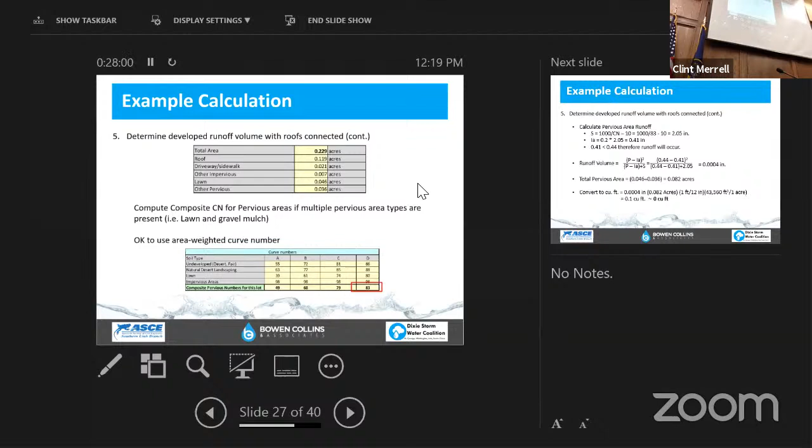So when we're doing our pervious area, we're going to use 83. Same calculation as before, except now we're using a curve number in that S equation of 83 instead of 86. When we run through this, we still get a little bit of runoff, but it's almost nothing, 0.0004, which calculates to 0. So with your roofs connected, any rain from 0.44 inches of rain on your remaining pervious area is just going to infiltrate or evapotranspire, not turn into runoff in this case. That'll be different for every site.

Okay, now we're going to calculate the runoff for the impervious areas - in this case our roof, driveway, and sidewalk. Because our roof is assumed to be discharging to a yard drain or directly to a driveway, we're going to go through this again, using a curve number of 98 for impervious area.

The other thing you should do is go through these calculations and look at your total impervious area - that's where you plug that number in. You convert that over to 141 cubic feet in this case.

So from this site, when we add up those two together, in this case it's only coming from the impervious area. So from this one lot, for 0.44 inches or the 80th percentile, we have 141 cubic feet of water we can expect to run off from this site.

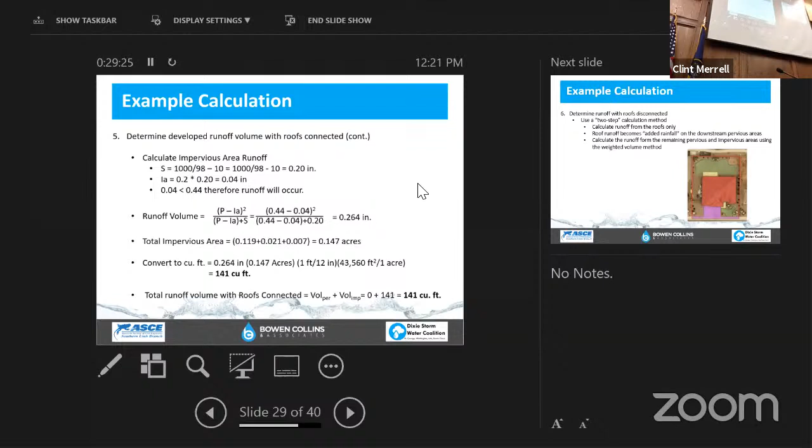Okay, so that was our roofs-connected condition. Now we're going to throw you another loop - this is going to be different. You've got to think about this.

We're going to use a two-step calculation method. Really, there's more steps than that, but we call it two-step because first you calculate your runoff from your roofs only - using only the area of the roofs and a curve number of 98. Then you take whatever you calculate from that and say that's now running onto my pervious area, spreading out and flowing across that pervious area. So that pervious area sees the same 0.44 inches of rain that the roof saw, but also an additional amount of rainfall coming from the roof. We're essentially converting that runoff from the downspouts into additional rain on the remaining downstream pervious areas.

So if you think about it, it really makes a lot of sense. This is pulled from a New Jersey manual. Now, you might say the New Jersey methods are probably not applicable to an arid location - I'm not making any claim that it is or isn't, but conceptually, this idea of converting your rainfall from your roofs, as long as it's adequately spread out as sheet flow, and putting it on some downstream pervious area...

I'll just speak louder, hopefully you can hear me. Play some musical chairs with the microphones. Speak loud for a second. Okay, I'll just keep going.

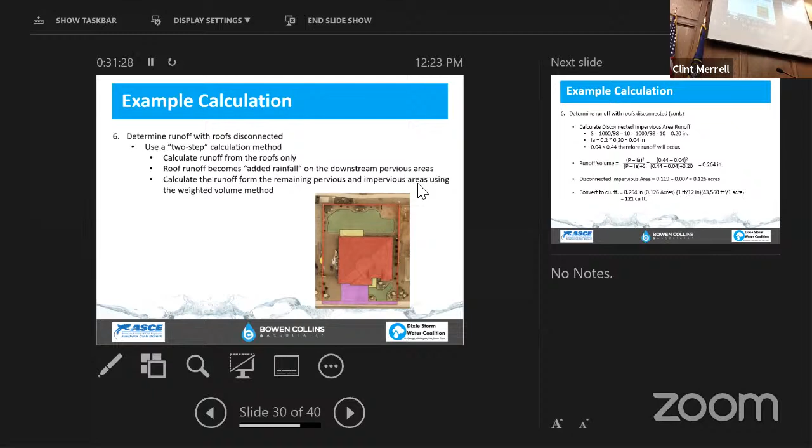So calculate the runoff from the remaining pervious and impervious areas using the weighting. We're going to take the roofs, put that on the pervious areas, then calculate the pervious area, and then calculate our remaining impervious area. So really it's kind of a three-step method - New Jersey calls it a two-step method, but you're doing roofs, pervious, remaining impervious minus the roofs, because we already accounted for those. The main takeaway here is you just have to say, okay, this is just my roof area, so I'm going to add up my roof area.

And actually, if you look back at my aerial there, I had some sidewalks that were flowing onto a lawn or some other pervious area. So I added those in there too, because those are really disconnected already just by virtue of the topography and the way the site's laid out. So my total is 0.126 acres.

You guys can hear me, right? I think Zoom can hear me because they're going off the microphone here. Let's just see, testing, testing. Yep, I got some bars showing that they're hearing something.

Okay, so I calculated just the runoff from my roofs. I'm getting 121 cubic feet. Before I was getting 141 cubic feet. That's kind of a hint. Most of this runoff was coming from the roof because it was the big impervious area on this site.

Now I have to take another step and convert that volume I just calculated, that 121 cubic feet, and convert it back into a depth and add it to my 0.44 inches. So I'm going to take that volume, 121 cubic feet, divided by the area of pervious that it's going to flow onto. Then you got to do some units magic, which you can follow in here. I'm going to get 0.4 inches. So rain that hits that roof turns into 0.4 inches that is added to the 0.44 to turn into 0.84 for the remaining pervious area.

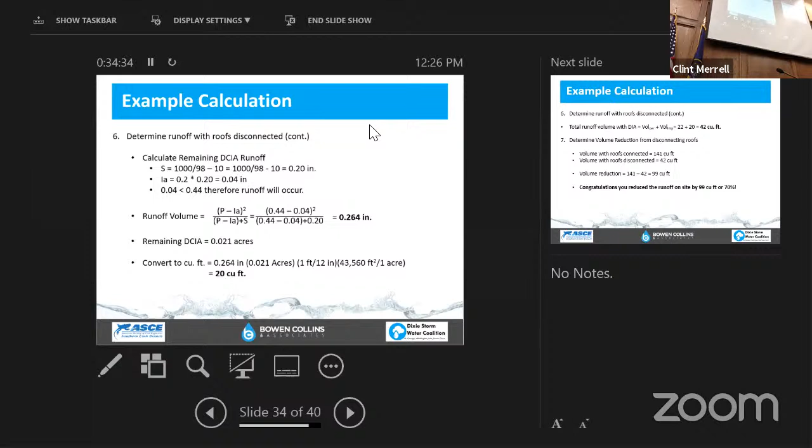So when it's all said and done, we took the rain from the roofs, put it on the pervious area, we got 22 cubic feet. Took the rain on the directly connected impervious, the driveway and sidewalks, got 20 cubic feet. We add those two together and we got 42 cubic feet. So to sum it all up, on this one particular site with roofs connected, we got 141 cubic feet of runoff. When we disconnected the roofs and allowed them to sheet flow across the landscaping, we only had 42 cubic feet. So we reduced the runoff by 99 cubic feet, or 70%.

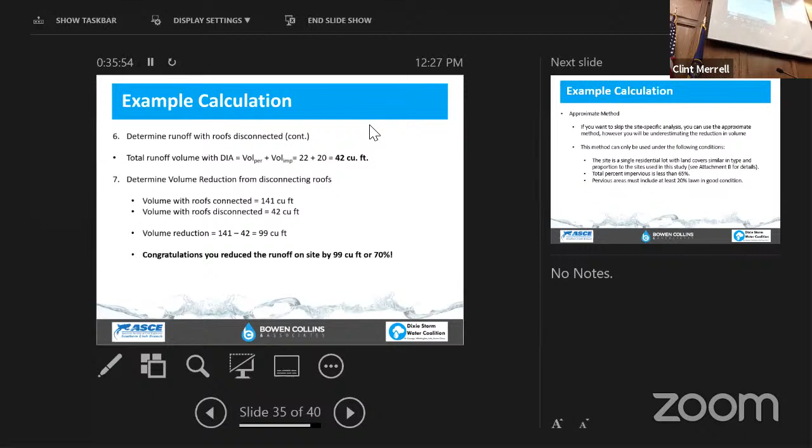In your type A, B, and C soils, this percentage is even higher. There's a summary table in the LID manual, but I'm going to need to issue a correction because in that manual it just kind of used the type D soils everywhere on one of the rows, so it's not quite right. But the percentage reductions listed in that table range from like 85% to 70% for this particular site. So it really makes sense to use the right type of soil. A lot of times engineers like to just use type D because they think it's going to be conservative, but in this case, more runoff is worse, right? So we want to store less water on site. It's really beneficial to use your A, B, or C, whatever it actually is.

Okay, so that was the site-specific method. I ran through it really quick, and I know you're not going to understand it just from that run through, but at the end of the day, what you got to understand is you're saying, I'm going to rain on the roof. That runoff is going to convert to something on top of the pervious area, and I'm going to rain on those two plus the roof, and then I'm going to get a number. The difference between that number and the first number of everything connected, all the roof and the rain, that's your reduction. So you can confidently say, I'm estimating I'm going to reduce it by X cubic feet or X percentage.

Now there is an approximate method that we put in the manual, and what it was based on was all these site analyses that we did. We looked at the percent reduction and kind of tried to pick something that would be conservative, that would underrepresent the actual reduction you're getting, so you're not counting on more reduction than you're actually going to get. So use the approximate method if you want something quick and dirty, but if you want the most bang for your buck, do a site-specific analysis, and you'll find that you probably have more reduction in runoff than you do with the approximate method.

There's a couple other conditions, and these conditions are based on the limited analysis we did with these 10 or 15 sites that we did. The site is a single residential lot with land cover similar in type and proportion to the sites used in this study. I know these are really limiting caveats, and you could, as an engineer, adapt these for your preliminary stuff to get an idea if it's even worth going down the site-specific analysis route. But if you're trying to submit this as an actual BMP, we don't have the data to say that for a big subdivision you can just multiply by this factor and get your reduction. We only have the data for the single lots that we looked at. We could develop other data in the future, maybe we will, but we didn't yet.

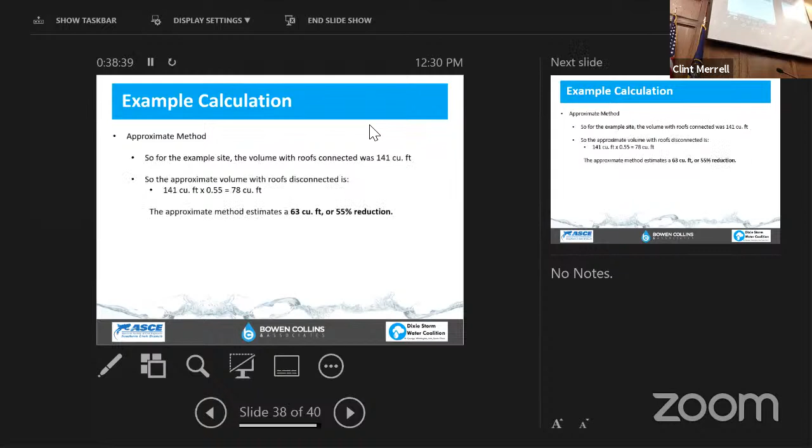So the approximate method is the same as the site-specific method until you get to step 6. You're still going to do your undeveloped runoff, you're still going to do your roof-connected runoff. But instead of doing that two or three-step method, you're going to take this table and look at what soil type you are and what reduction factor you have. In our case, we're type D, so we're going to use 0.55. We're just going to take the runoff from our roofs connected, multiply by 0.55, and we're going to say, okay, we're reducing the runoff down to 78 cubic feet. So we're reducing it by 63 cubic feet, which is that 141 minus 78, or a 55% reduction. Well, you guys saw that in the site-specific analysis, we actually calculated a 70% reduction, or a 99 cubic foot reduction. So we didn't quite get all the credit that we deserved for disconnecting those roofs.

That's why the site-specific analysis is going to help you out better than this approximate one. This is real quick and dirty: you do your normal curve number analysis, multiply by this factor, and you get an idea of, yeah, okay, I'm going to reduce it by 55%. You don't even really need to do the analysis, because you could look at the table and it's going to say I'm going to reduce it by 55, right?

Okay, we got a question. Will that be acceptable to the city? Do they want to see site-specific calculations showing that, or can you just say, hey, I ran through the approximate method?

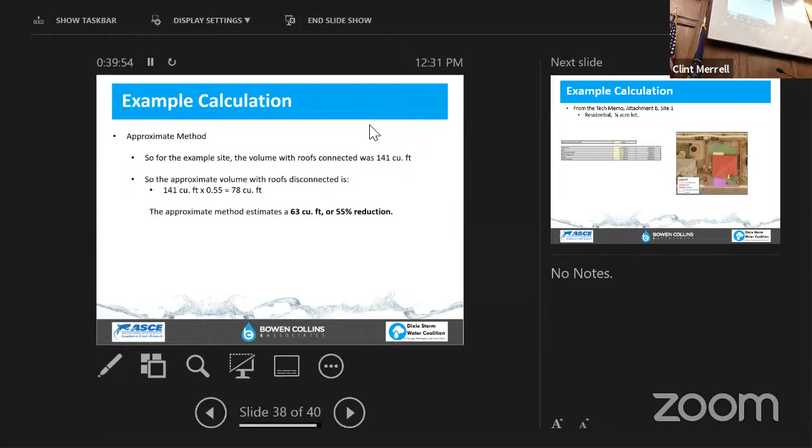So the question is, is the approximate method acceptable to a city? I think yes, it's acceptable. But at the end of the day, what you're going to do is take this number that you calculated and say, okay, instead of providing a BMP that now stores 141 cubic feet, maybe now I only need to do a BMP that stores the difference. So what was it? We reduced it by 70%, or 99. We had 42 cubic feet still that we are running off from our site, right? Well, now you're going to look and maybe put another BMP in that captures that.

Maybe you're doing this on a site level in your detention pond, but now your retention area is much smaller because each of your individual lots are spread out and not running off as much as they were before. So the city could come back and say, sure, use the approximate method, but you still have X cubic feet of water running off. What have you done to justify that you can't provide another BMP to store that remainder? Does that make sense?

So this is technically another BMP you could use. It's not quite translatable to the other methods in the state manual because they use runoff coefficient versus curve number. But I think most cities in the area will look at this as another tool in the toolkit for BMPs. If you show them you calculated this, and say on your plat map that all lots developed here can't have their roof drains connected, and they meet the requirements of the city or stormwater coalition for disconnected impervious area, then they'd probably say okay, you only have to retain this much with the remainder. And if you can't do that and you've justified it with technical feasibility, then you're good to go.